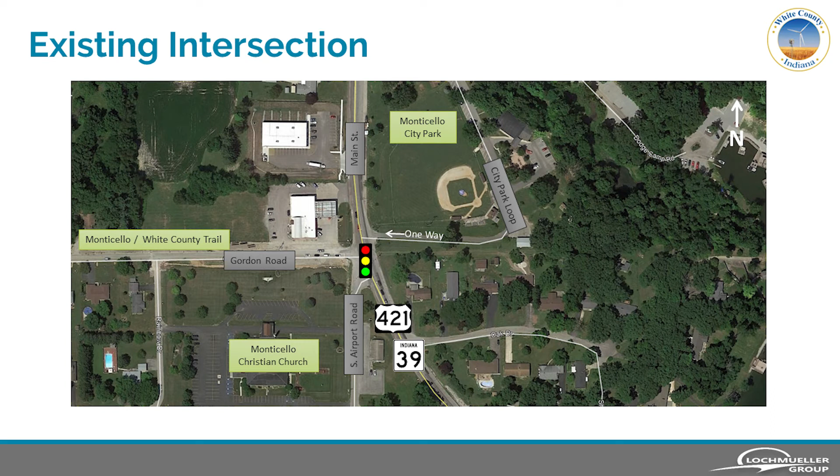The existing intersection is signalized, and separate signal phases are necessary to clear queuing traffic from Gordon Road and Airport Road, which causes delays on the primary north-south route. The need for the project stems from the low level of service for the existing signalized five-legged intersection. Level of service is a metric used to measure traffic flow, of which there are 6 levels, from level of service A, which indicates free-flowing traffic, to level of service F, which indicates oversaturated traffic flow. A level of service C is considered acceptable.

Lochmueller Group performed a traffic study in January of 2020 and found that due to projected traffic growth in the design year, 2042, the level of service of the current intersection will become level of service F, which is considered oversaturated and unacceptable. An additional need for the project is the lack of available accessible non-motorized transportation routes near the intersection. Currently, no pedestrian facilities exist connecting the north and south entrances of Monticello City Park, nor does the Monticello White County Trail connect to Monticello City Park presently.

The purpose of the project is to improve the level of service of each approach at the intersection to at least a level of service C for the design year. The project also seeks to increase the availability of non-motorized transportation facilities and accessibility in the area of the intersection.

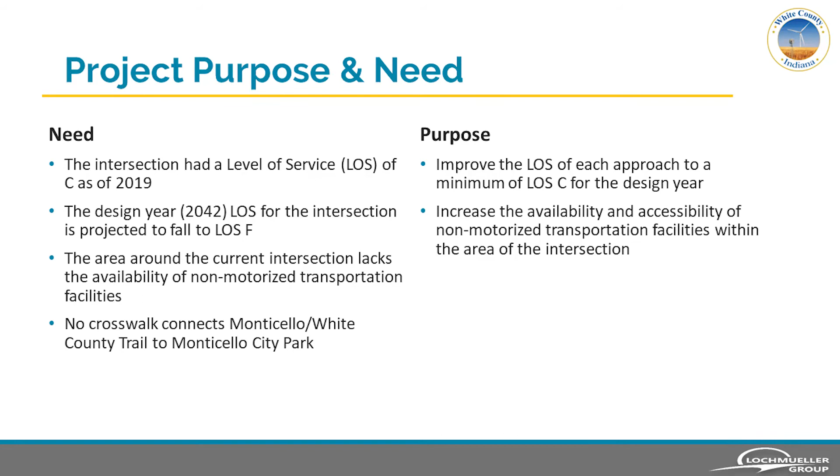The 2 alternatives considered for this project were a roundabout intersection and the no-build alternative. The roundabout intersection is preferred because it is well suited to handle the unique 5-legged geometry present at this intersection. This alternative satisfies the project's purpose and need by achieving a construction year level of service A and design year level of service B, while also introducing additional multimodal transportation facilities.

The no-build alternative involves no intersection improvements. Though this alternative has no immediate cost and involves no environmental impacts, if intersection improvements are not made, the level of service of the intersection will become suboptimal, and there will be no improvement to the availability of non-motorized facilities in the area.

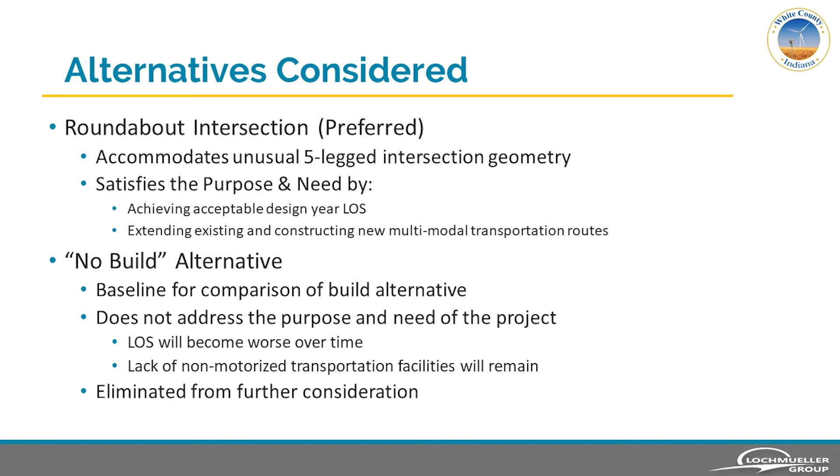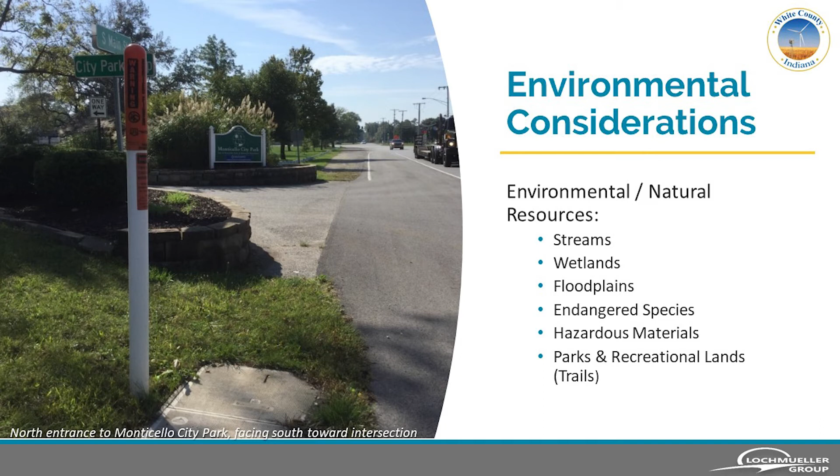This alternative was dismissed from further consideration because it does not address the purpose and need of the project. The environmental process weighs the project's likelihood to impact various environmental resources. These include impacts to the ecological or natural resources like streams, wetlands, and other waterways, floodplains, farmland, forests, and endangered species. Field investigations to document the presence of these resources were completed in late 2019. The project was found to have no substantial impact among these environmental resource types.

The environmental document also considered human resources, including cultural resources, parks and trails, impacts to air quality and noise, and potential impacts to low-income or minority populations. Most notable among the elements investigated as part of the environmental study were the Monticello City Park and the Monticello Christian Church, which are both considered historic resources and are eligible for listing in the National Register of Historic Places. Due to that designation, the project's impact upon them had to be evaluated in great detail. It was determined that the project would have no adverse effect upon each historic resource.

The Monticello City Park and the Monticello White County Trail are both publicly owned recreational resources and are entitled to Section 4(f) protection under the U.S. Department of Transportation Act, which seeks to avoid converting recreational resources to a transportation use. Impacts to these resources were determined to be minimal.

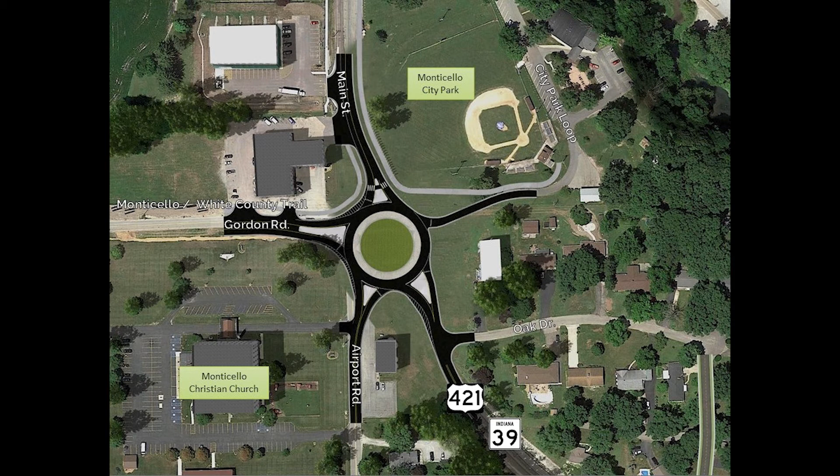The preferred alternative for the project involves the construction of a single-lane roundabout at the intersection. The roundabout includes one 18-foot wide circulating travel lane with a 12-foot 6-inch truck apron and a 2-foot wide mountable roll curb. The center of the roundabout will be a 115-foot diameter sodded area. All roadway approaches to the roundabout will shift to the south or southeast and require full-depth reconstruction and new curb and gutter. Oak Drive will retain its current alignment and will not tie into the roundabout.

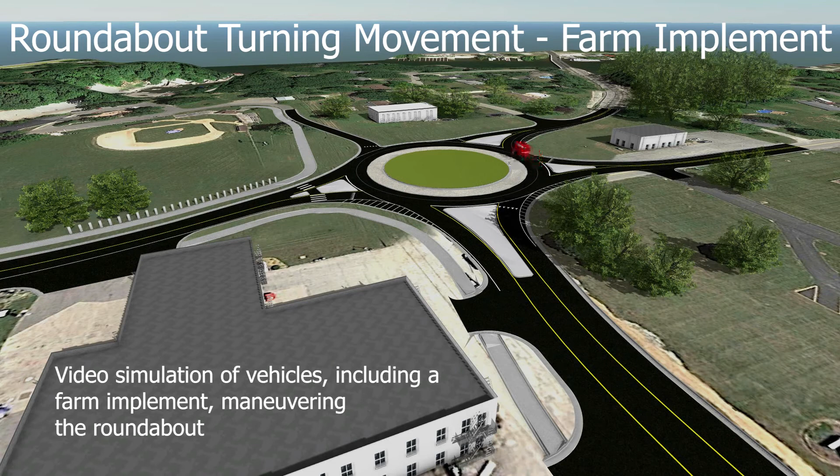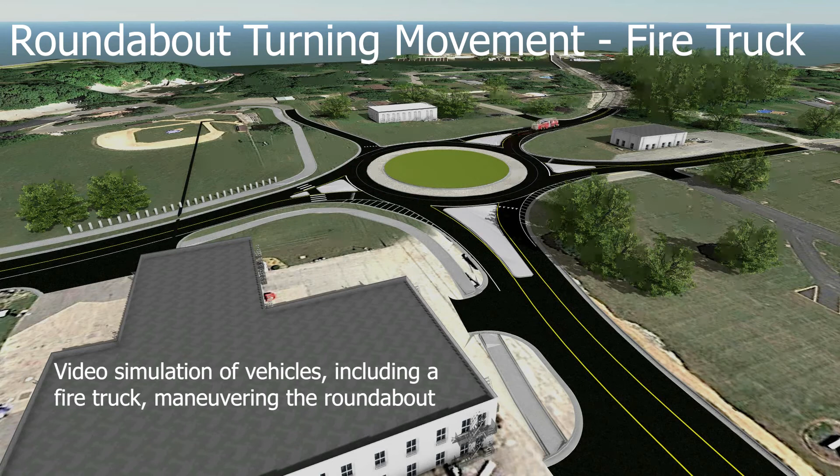The preferred alternative also involves the extension of non-motorized facilities along Gordon Road and South Main Street. The improvement reconstructs the multi-use path known as the Monticello White County Trail to follow along the north side of Gordon Road's new alignment as it approaches the new roundabout. The trail will then travel north along the west side of South Main Street to the first commercial entrance drive and connect to previously constructed sidewalk at that location. A crosswalk will be constructed across South Main Street on the north side of the roundabout to connect to the south entrance to Monticello City Park.

A 10-foot wide multi-use path will also be constructed within Monticello City Park and begin at a point to the southeast of the baseball fields and continue west along the current alignment of City Park Loop. As it approaches the south park entrance, the path will travel north and end at the northern entrance of Monticello City Park. Americans with Disabilities Act compliant curb ramps will be constructed at all locations where the new non-motorized facilities will cross a roadway.

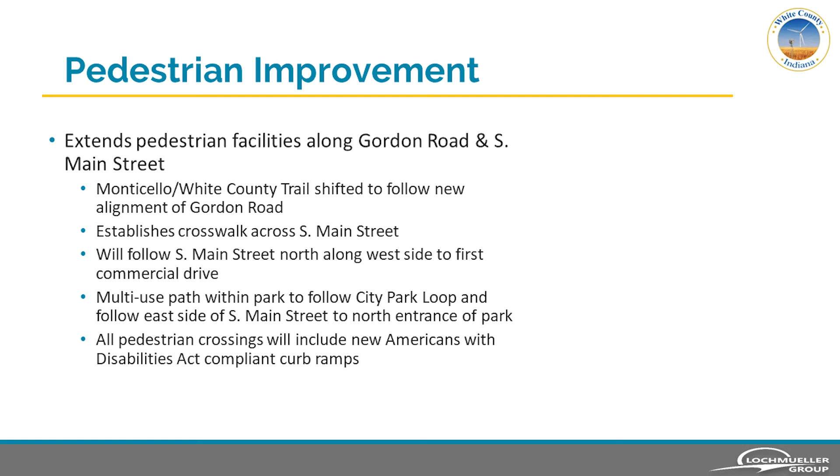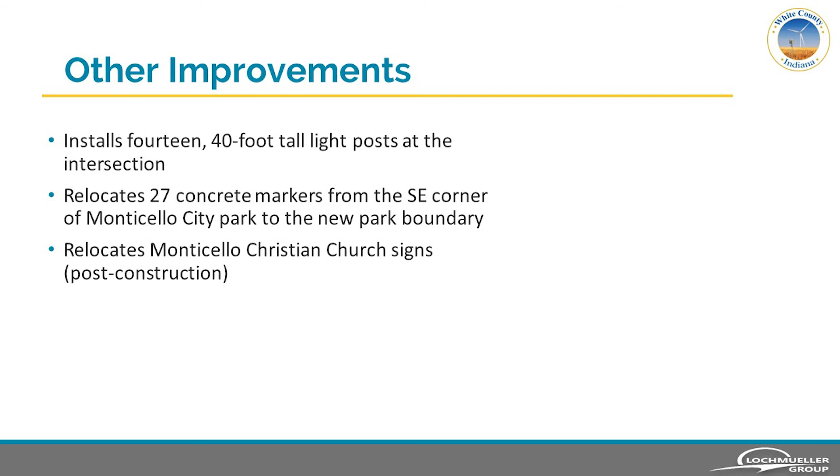The preferred alternative will also involve the installation of 14 40-foot tall light posts at various locations around the new roundabout. In the southeast corner of the Monticello City Park property, there are concrete markers delineating the park boundary. Due to the roundabout and new path construction, 27 of these concrete markers will be relocated to the new boundary of Monticello City Park. The sign for Monticello Christian Church at the southwest corner of the intersection will be removed during construction to accommodate the construction of the temporary access road between Gordon Road and South Airport Road. Once construction is complete, the sign will be relocated to a location near where it currently stands.

In order to facilitate traffic around and through the intersection, a maintenance of traffic plan has been developed. The maintenance of traffic will occur in two phases. The first phase will require restricting access to South Main Street, also known as US 421 and State Route 39, to motorists traveling along Gordon Road and South Airport Road. A signalized temporary access road will be in place in the southwest quadrant of the intersection to maintain traffic between Gordon Road and Airport Road in both directions.

The proposed detour will utilize Gordon Road, 6th Street, also known as County Road 500 East, and US 24 to facilitate traffic from Gordon Road and South Airport Road to South Main Street. During the first phase, 2 lanes, one in each direction, of South Main Street will remain open to through traffic. Additionally, the south entrance to the park, City Park Loop, will be closed. Access to the park will be maintained through the north entrance. The first phase is anticipated to be in place for approximately 7 months, beginning in the spring of 2023.

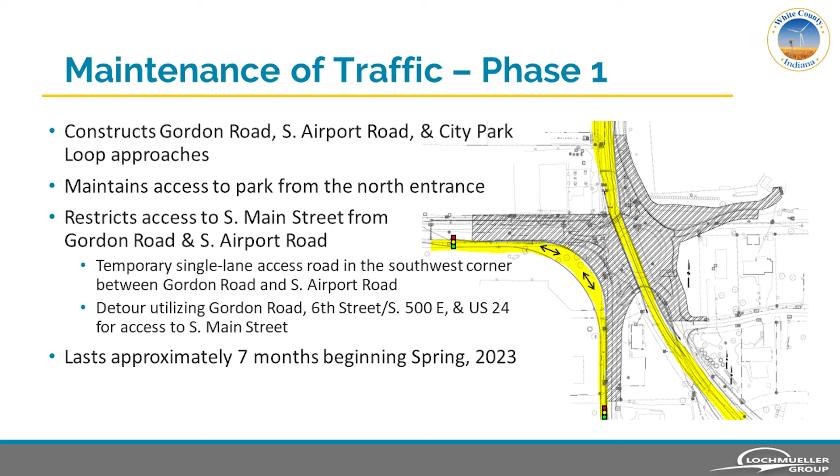The second phase of the maintenance of traffic plan will involve temporary lane closures for traffic along South Main Street, north and south of the new roundabout, with temporary signals in place to facilitate traffic. The construction of Oak Drive will also occur during this phase, which will close one lane of traffic at a time. Access to South Main Street from Gordon Road and South Airport Road will be restored.

The temporary access road will be removed, and the disturbed area will be reseeded. The second phase is anticipated to be in place for 6 months and begin in the spring of 2024.

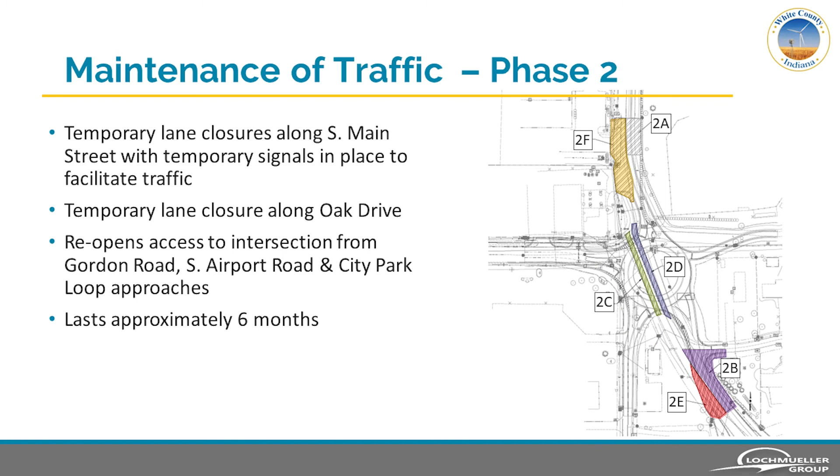Available online are 2 pamphlets addressing the concerns of right-of-way. The first is a blue pamphlet titled Acquisition: Acquiring Real Property for Federal and Federal Aid Programs and Projects. This document explains the process of buying property required for highway improvements. The project is anticipated to require 1.61 acres of new permanent right-of-way.

The second pamphlet available online is green and is titled Relocation: Your Rights and Benefits as a Displaced Person under the Federal Relocation Assistance Program. This document explains the process and your rights as a relocated person. The project does not require the relocation of any businesses or residences, but a second pamphlet is also available that describes your rights as a relocated property owner associated with a federal aid project.

All right-of-way purchased for the project will comply with the Uniform Act of 1970, which requires all federal, state, and local governments to offer just compensation for any acquisition. The compensation offer is not allowed to be less than the fair market value of the property.

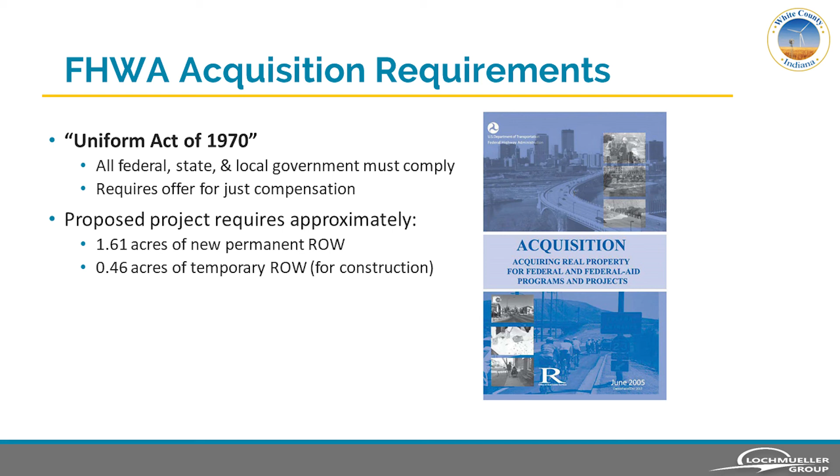Once an agreement is reached between the county and the owner, the owner will be asked to sign an acceptance offer and the deed of transfer. Should no agreement be attainable, mediation may be pursued as a way to determine if a mutually agreed upon amount may be reached. If not, condemnation proceedings on the property may be advanced.

The total estimated cost of construction of this project is $2,777,520. Final approval of the environmental document is planned to occur in September 2021. Construction is anticipated to begin in April 2023.

The project's in-person public hearing will be held on Thursday, August 19, 2021. The hearing will be held at the Monticello Christian Church, 105 Gordon Road. The project team will be convening in the Forge Building, which is south of the main church building. Doors will be open at 6 p.m. Eastern Time, and the formal presentation will begin at 6:30.

Open house sessions will occur before and after the formal presentation and comment session, during which the public can informally interact with the project team. As stated earlier, there are several ways that you may officially submit comments during the public comment period. For those watching this pre-recorded presentation, the project documents may be viewed on the White County website or at the Monticello Union Township Library. Comment forms may be found in the same locations as the project documents.